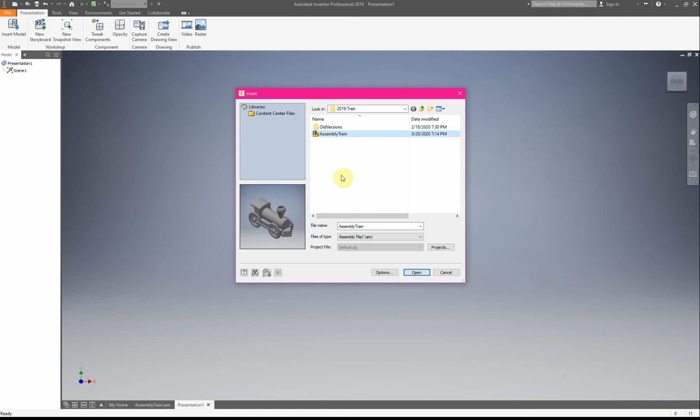So what I'm going to do is bring in my train assembly. When I have an assembly for something, I just like to leave assembly in there - it just makes it easier if the little icon doesn't show up. Alright, click Open.

So what we're going to do now is Tweak Component - click on our component, click on the arrow, and drag it where we need it to be. Then you just click OK, or the little check mark. And then you just keep doing this.

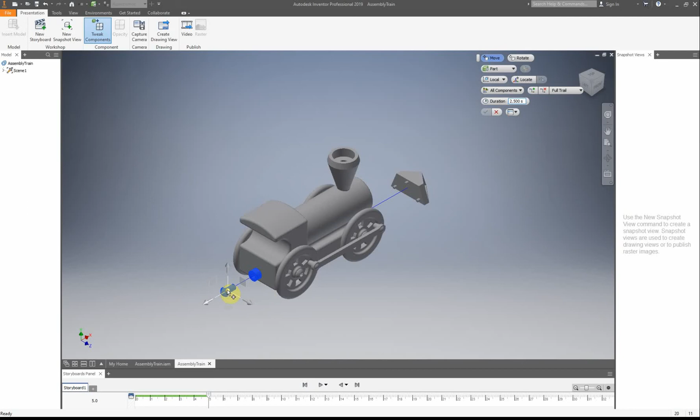I'm going to turn my part, click the part and move it. If I press Shift on my keyboard, I can select another piece and move that too. So I'm going to put it back to the original location and make sure that they're far enough away. They both are, so I'm going to click OK.

Now what I'm going to do for this one is Tweak Component again. I'm going to first click on - I forgot to press Shift - click both of the linkage pegs, and move those forward out of the way of the linkage arm.

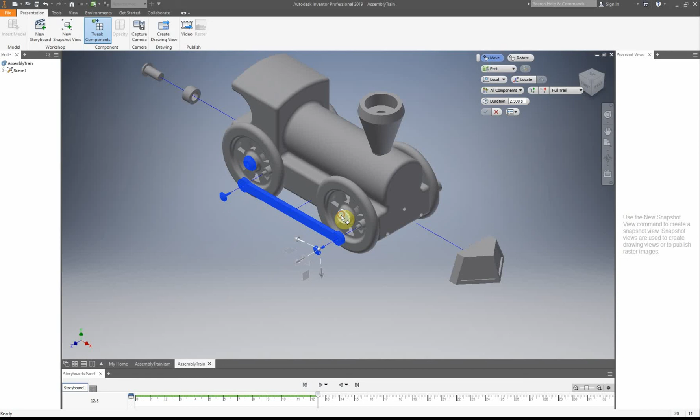Press Shift, click on the linkage arm, move it out of the way of our axle pegs. Press Shift, click on both axle pegs, let go of Shift, click on our arrow, drag it out of the way of the wheels. Shift, click on both wheels, drag it out of the way, click on our check mark.

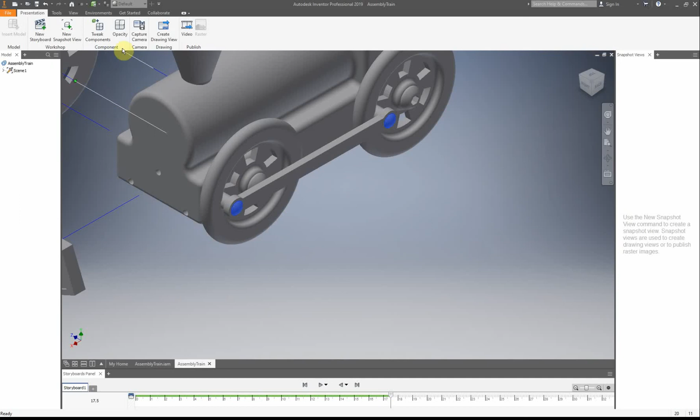Alright, so right now we have this all spread out. So we're going to do the exact same thing we just did to the other side. Again, if you need more than one, Shift. It would help if I clicked on Tweak Component first.

Move it out of the way. I'm going to move it just a little bit further than I did before because we're going to be doing it from the other side. It might make life a little bit easier - we'll find out in a minute.

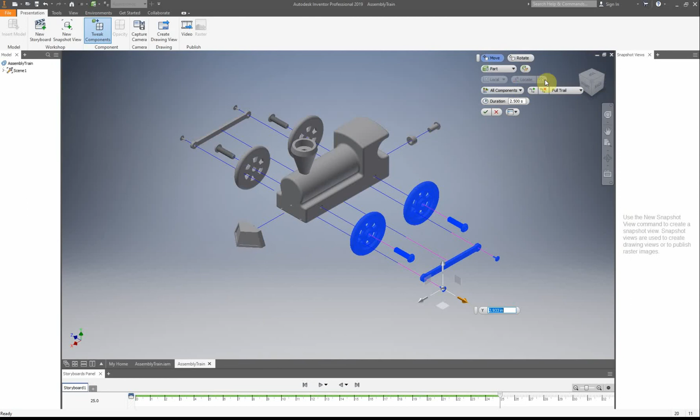Gotta zoom out. Alright, so I think I have it far enough, but I'm not entirely sure, so we're going to move it. Yeah, it looks like I have everything good. I know the stack is covering up one of the wheels, but that is totally fine because we're about to move the stack.

So Tweak Component and bring it up above the wheel. See? Doesn't have a problem there. So let's see - that's it, that's the whole file.

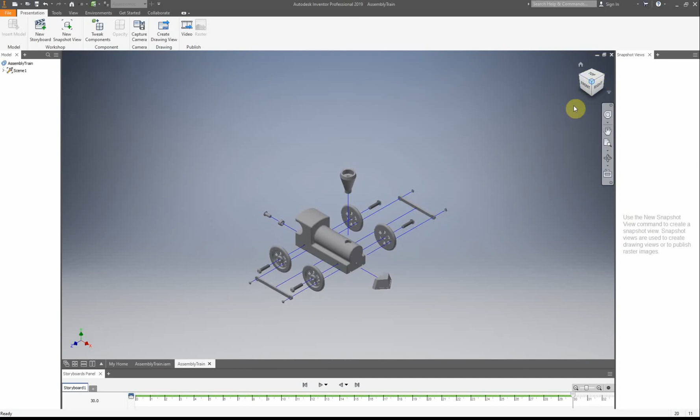Quite simple. So you just need to make sure that all the parts are not overlapping anywhere. If they are, you're just going to have to click on the component and move it out again.

And then I'm going to go over the snapshot thing here now, because in the next video, if you have an issue, this is the file you're going to have to come back to. So I'm going to make another snapshot - you can see that I'm going to make a few here.

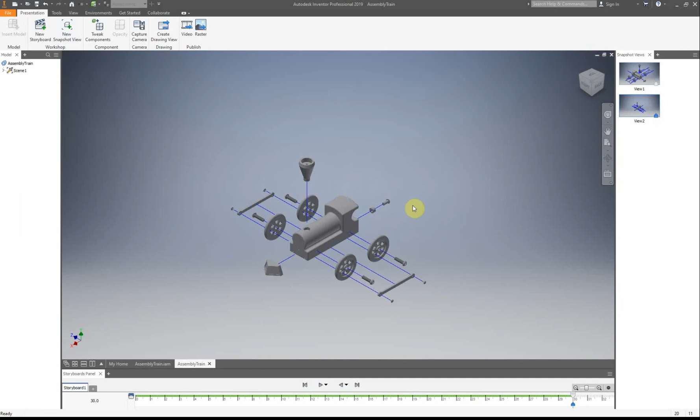We have - actually that one looks ridiculous. Okay, so you can kind of see how that is nowhere close to what we want it to be. We want it to be this view 1, not this view 2. So what we could do, if these were in a different order and this was the top one, we could just right click and delete, right click, delete, make sure it's the way that we actually want it to look, and then do the snapshot.

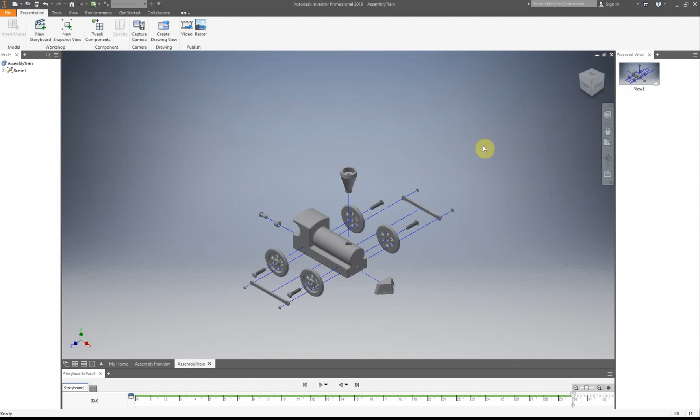Okay, so that's a little thing for the next video. If you do have an error, this is what you're going to have to fix for it. So that's it for this one.